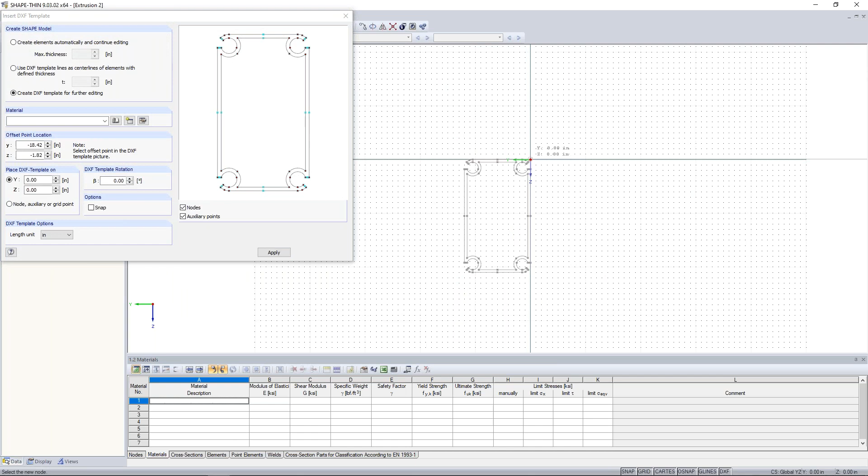So I can click OK through these dialog boxes, and now we'll be presented with our drawing grid where I can simply click within the origin to get a background layer of this cross section. Now, it's not quite as easy as just clicking a button and calculating the cross-section properties.

What we need to do is create these elements that make up this section. The reason we have to do that is because this will allow us to calculate those width to thickness ratios as well, which the program wouldn't be able to automate otherwise. But we have some helpful tips and tricks within this program that will allow us to do so.

Under Edit, we have the ability to set elements with the DXF template, and the first option is to set the center lines. This allows me to click two of these lines, and automatically the program will create the center line between these two DXF background lines. I'm only going to do a quarter of this section because everything is symmetric. Once I get a quarter completed, I can use the mirror tool to create the rest of the cross section. Once we've set these center lines, the next step would be to set the elements, and I do need to define a material here.

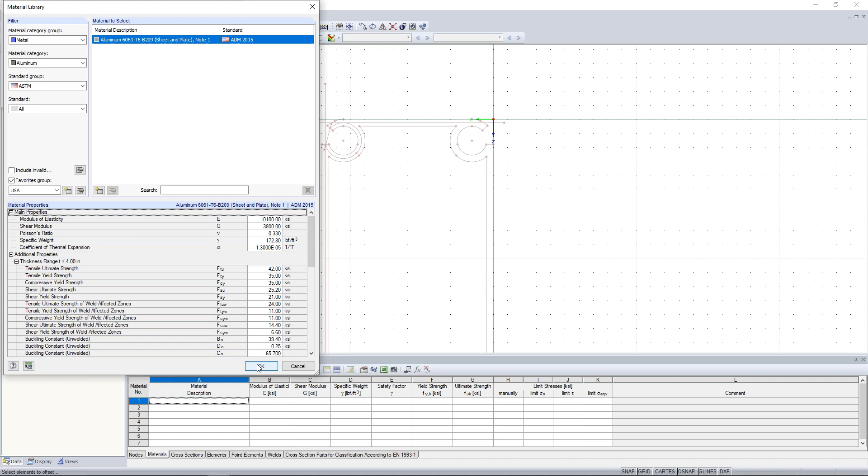The material really doesn't matter within SHAPE-THIN, because we're going to end up redefining it once we get into RFEM. But SHAPE-THIN does require something set here to calculate the cross-section properties. Under the ADM standard, we have all our aluminum materials. I've added aluminum 6061 to my favorites group, which I can quickly select. Again, this is irrelevant since we'll redefine it in RFEM.

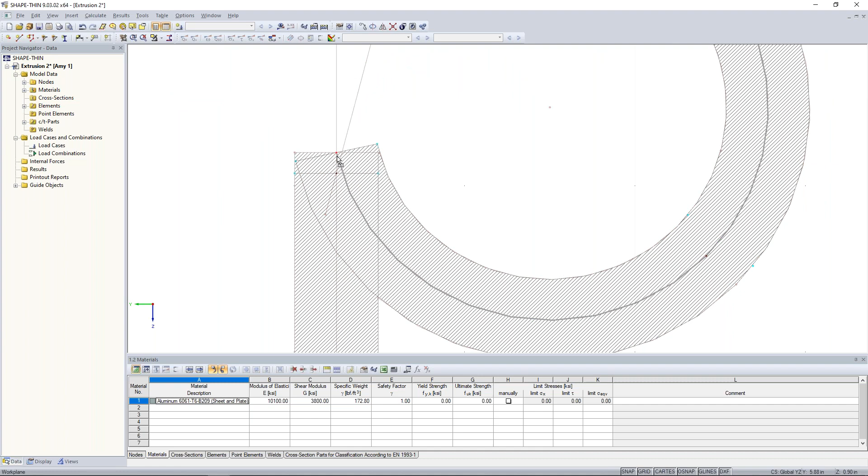I can simply click on these center lines, and you'll notice the elements are automatically set. We need to clean this up slightly by dragging and dropping to the relevant points. Zooming in on both elements on the left, you'll notice this is the width-to-thickness element shown here. The program recognizes what's closed on one side and open on the other, which is important for local buckling considerations within the aluminum design manual.

Now that we have these elements set in the upper left, I'll highlight them and unselect my C-to-T ratio on the left. I'll use my mirror tool, similar to what we'd see in AutoCAD, where we can create a copy and mirror about the Y plane, then graphically choose my mirroring point. I click OK, and now I can see my elements generated at the bottom.

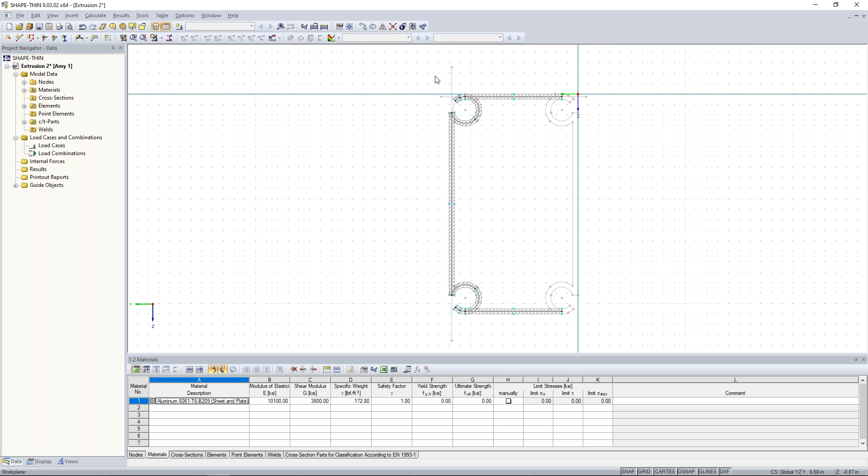Finally, we do the same process on the left-hand side, deselecting these C-to-T ratios, top and bottom. We use our mirror tool, this time mirroring about the Z-axis. We choose our mirroring point somewhere in the center. I click OK, and now our element is complete.

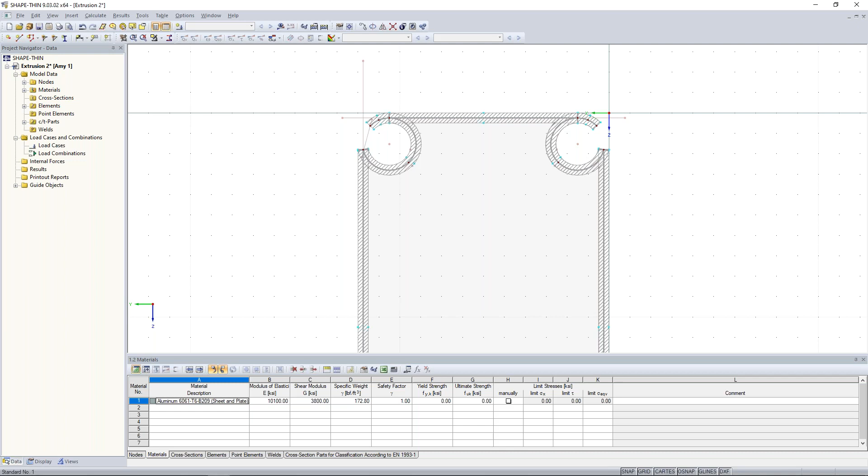Now, one thing we need to do: we can only check local buckling of straight elements. Currently we have C-to-T ratios set for the curved elements as well. If we kept those and went into RFEM, we'd get an error message saying we can't check local buckling of these small curved elements. So I'll delete those altogether on my keyboard, but we still have them for the straight elements. We're finally ready to run our calculation.

All I need to do is click Show Results. The program begins the calculation, and I'm immediately presented with an error telling me that FY for my material is not positive. What does this mean? If we look at the table for this material, you'll notice the yield strength and ultimate strength are set to 0. The reason is that for aluminum we have different strength values depending on whether the member is in tension, compression, or shear.

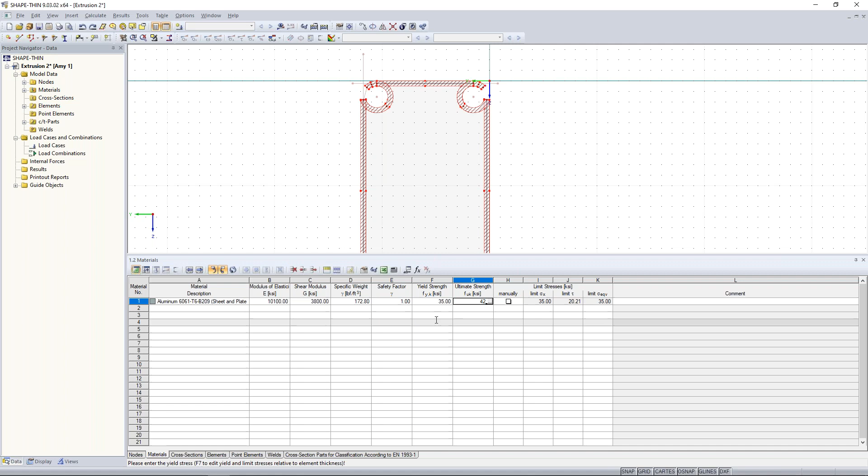So we just need to set some arbitrary value here to calculate these cross-section properties. I can just set 35 and 42 - it really doesn't matter. I try and run this result again. The program gives one more warning message saying the load case was not defined. That's fine, we're not doing a stress analysis within SHAPE-THIN, we're just calculating these cross-section properties.

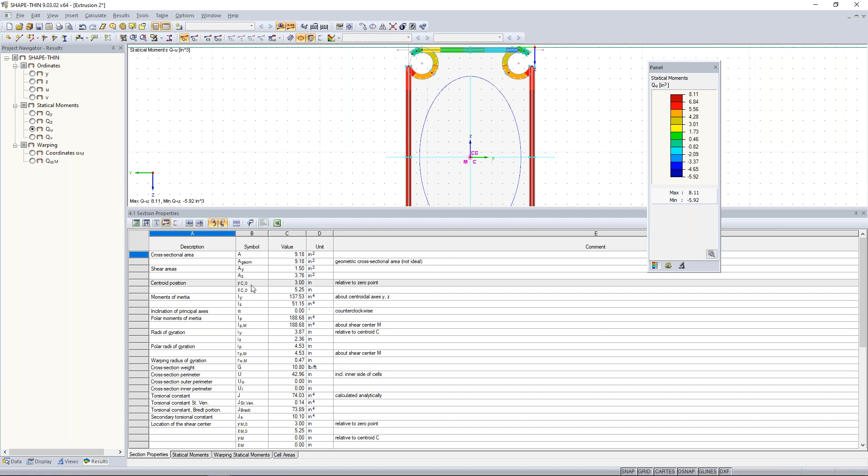Now you can see after the solution is run, in our table here is all of the cross-sectional properties for this custom extruded section, including the area and the moment of inertia. We have the section modulus here, so everything we'll need to integrate into RFEM. It's really important that we save the calculated results - if we don't save, once we bring this into RFEM, the program won't know the cross-sectional values. So be sure to save that, and we are now ready to jump into RFEM.

Here is our main FEA program, and you can see the interface looks pretty similar to what we just saw within SHAPE-THIN, but this is where we'll be able to generate our entire structure. I have my graphical interface, and I'm going to begin by modifying my drawing grid, starting off by drawing a few nodes. I'll go to my toolbar and choose New Node, and I can either select it graphically on my drawing grid, or type in the node coordinates directly.

So we'll start off with 0, 0, 20. I hit Enter on my keyboard, and that first node is generated. The second node will be 0, -10, 17.25.

And finally, my third node is going to be 0, -30, and 0. So I have these three nodes that are generated that will somewhat form the left side of my arc here.

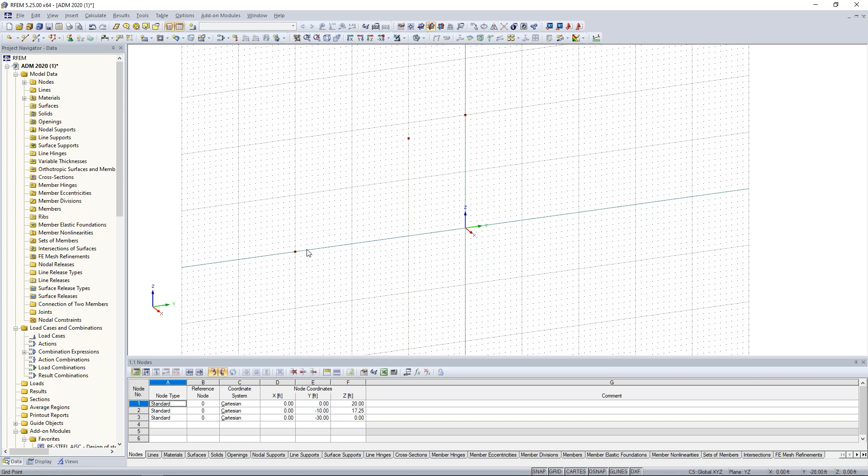I'm going to draw a new line element, and instead of a straight line, we'll choose this option, an arc. I click on my second point, I click on my third point, and then I can either select the radius graphically or type in a radius of 30 feet.

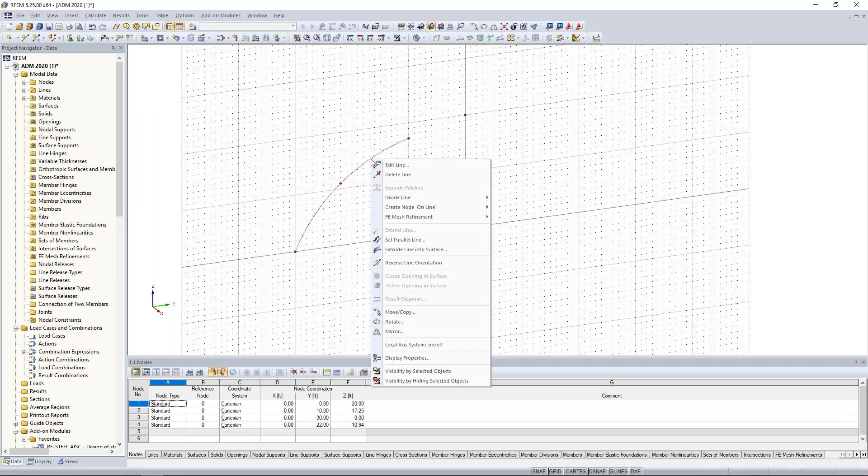I hit enter, and I'm going to take this arc, right click, divide the line by a certain number of nodes, and set this to 3 intermediate nodes. The entire purpose of this is I'm going to take some of these node elements here and completely delete them, so all I'm left with is a series of nodes that will form the left side of what will be my arch frame here.

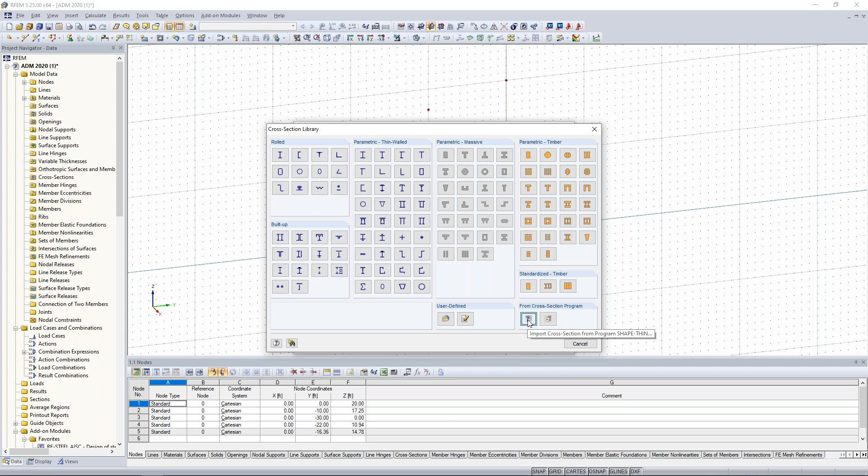So I'm going to draw a new member now, and the new member will have the member type set to beam. I want to generate a new cross section, so I visit my cross section library. Of course, we have all the cross sections from the ADM standard, which we'll get into in a minute, but for this first member, I want to integrate that custom extruded section from ShapeThin, which I can choose with this button in the lower right-hand corner.

Immediately I navigate to where my saved results are, and we see that custom extruded section. Just for reference, if we tried to access one of the other shapes without saving the results, we'd see an error message saying you need to calculate and save the results. But for us, we already did that.

So I click OK. Then we also need to set the material. My material is already set, but if you're creating this section for the first time, you'd likely see a steel or concrete material here.

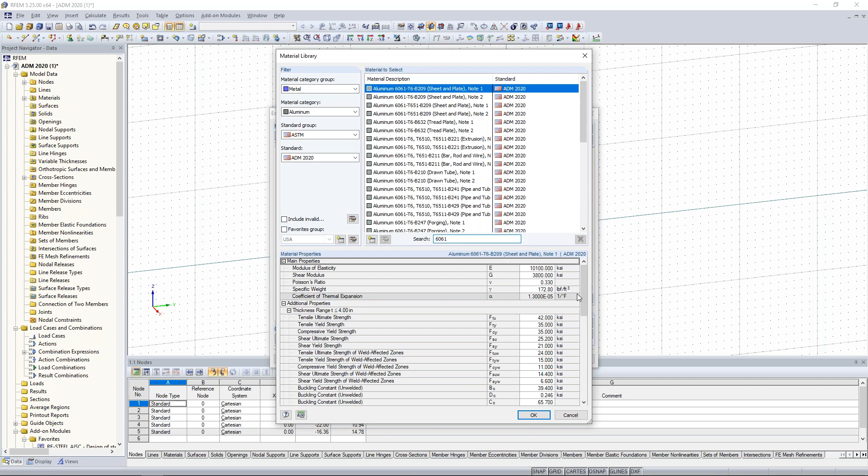So we can always access our material database, and this looks familiar—we've already seen this in ShapeThin, where we can use our filters on the left to navigate to aluminum, to the ASTM, and to the ADM 2020. Again, we have just about every aluminum material you would need here. We can also take advantage of our search functions to select the relevant material, and all the material properties are given to us in this table format.

Once we have the material set, I can click OK through all of these dialog boxes and begin modeling my first series of members. I'm just snapping from one node point to the other here, and we'll finish at the top of the structure.

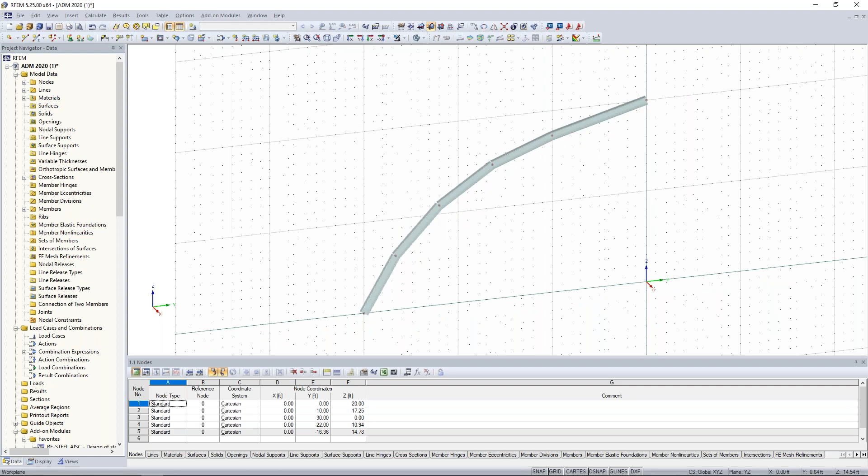Now, notice something also powerful about integrating from ShapeThin is that we actually get the rendered shape here. With some general sections we're just getting some type of blob outline, but we'll actually be able to tell the orientation of that cross section based on the rendered shape.

We'll also notice that these are a series of individual segments, and in reality we'd like to design these as one continuous member. So what we can do is highlight all of them, right-click, and under member we have the ability to create sets of members.

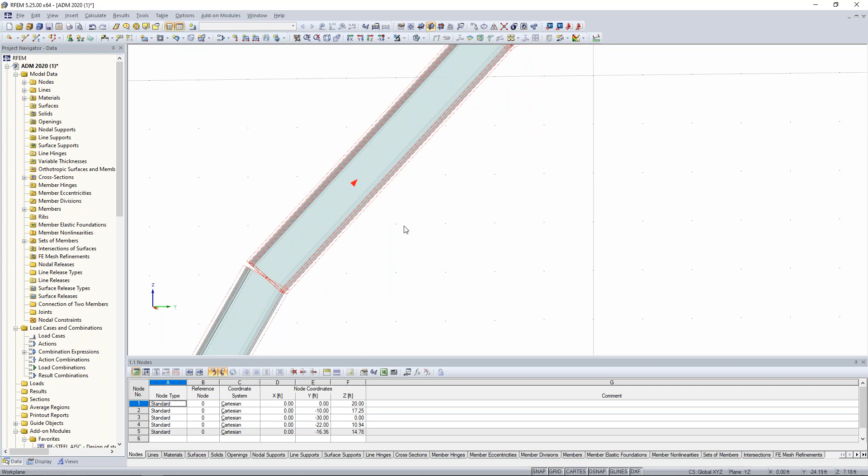This isn't going to modify the analysis—all this will do is group these series together. Once we get in the RF-ALUMINUM ADM module, we can actually design this as one continuous member. So we'll see this set of member symbols; if we zoom in, it's just a faint dotted line kind of grouping these all together. So we have the left side here.

I'm going to highlight all of my elements and utilize my mirror tool. I'll create a copy, mirror about the XZ plane, and mirror about the origin 0, 0, 0. I click OK, and now we have the right side to our arch here.

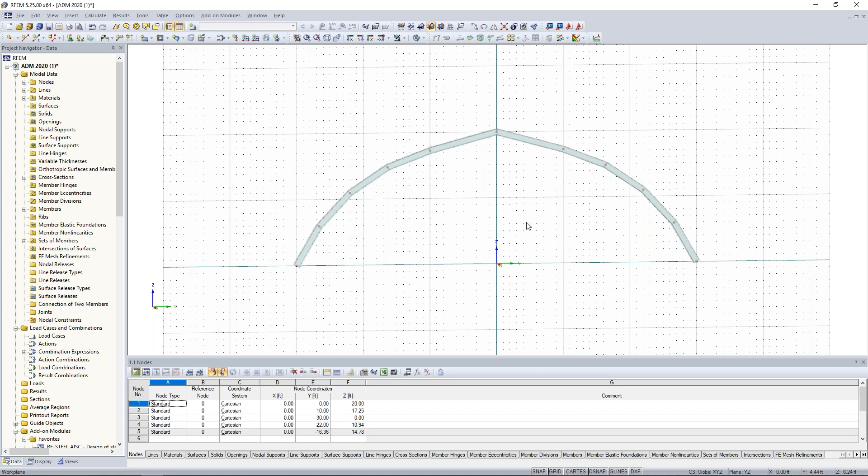Sets of members was also copied, so I don't need to worry about grouping those all together. Okay, so I'm going to take all of these elements with my selection window here, and notice that I'm selecting all of my elements except for my bottom two nodes, and there's a reason for this.

I'm going to go up here to my Move Copy tool, and I'm going to create 4 copies in the global X direction of -16.5 feet. And I'm going to visit this detail settings here—within the detail settings, I have the ability to create copied lines between my copied nodes.

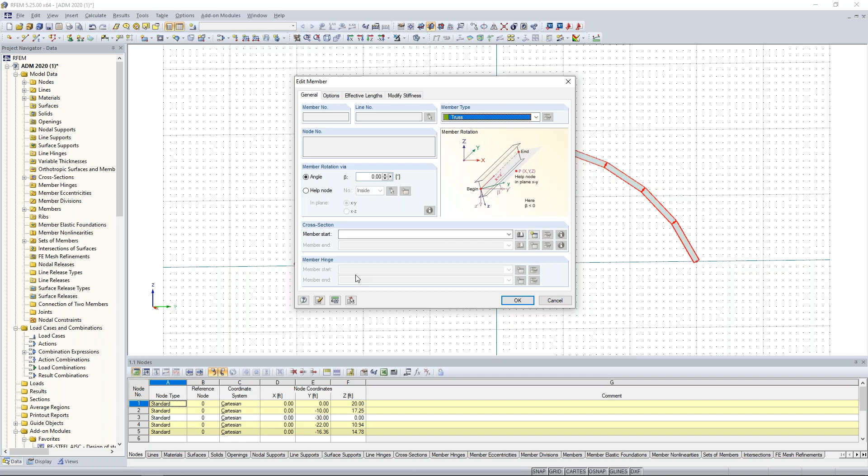And even more so, I can assign a particular cross section to them. So I create a new member, and this dialog box should look familiar. We're going to create now what's called a truss member. So a truss will just internally apply a moment end release to the beam. And you can see under here, under the member hinge options, this is automatically grayed out because the program will apply this by default. And we do need to create a new cross section.

So I go to my cross section library, and this time I'm going to choose a tube section. And within the tube section, you'll notice here that if we use our filter once again to filter to the ADM 2020, we have all of the relevant cross sections to this particular standard. And we scroll down here to choose a 6x6 by 0.375. Now I've already defined that aluminum material for my first beam, so I don't need to define it again. I just simply select it here from my drop-down box and I click OK.

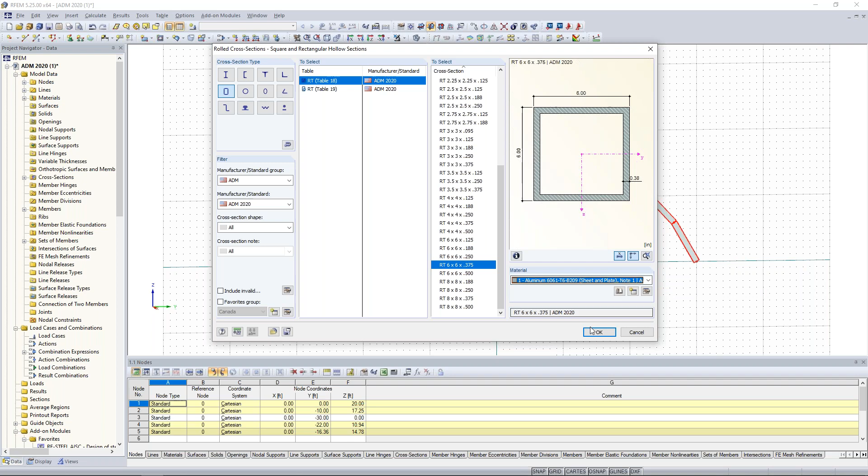So I click OK through all of these dialog boxes, and now we'll notice that the program has generated these truss elements in between my copied nodes. And under the display tab, if we scroll all the way to the bottom, we can view these members by member type, and now we can see which ones are defined as beams and which ones are defined as truss elements.

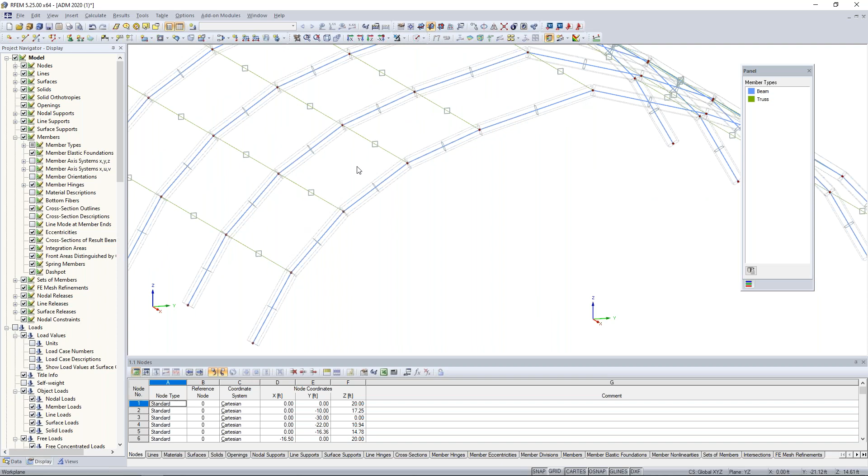Now, something to notice about these tube members spanning in between our main frames here, if I turn this to wireframe view and I scroll up here to my display options and I view the cross-section outline. Well, the tube elements are oriented here according to my global X, Y, and Z axes. They're just kind of facing in the vertical direction here. But in reality, I'd like to see them somewhat angled to kind of follow this arc radius along the main frame here. So how do we adjust each one of these without having to manually do it?

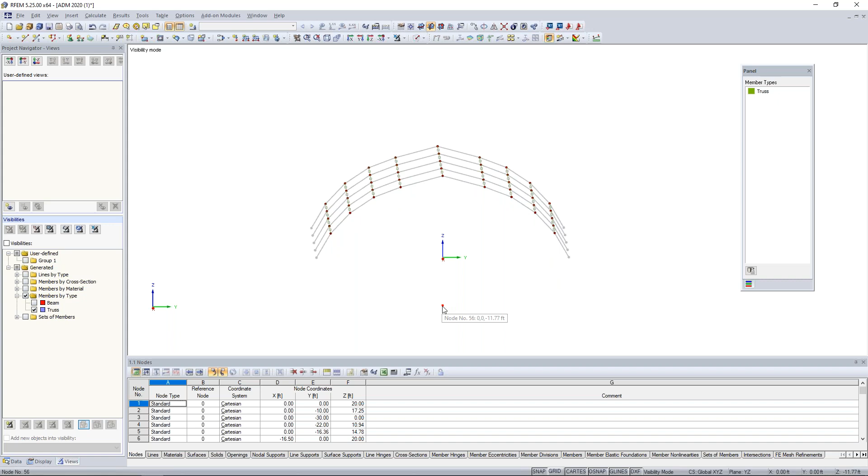Well, under the Views tab, I am going to select the option here to view the members by type, and I'll select all of my truss elements. So now everything else is grayed out within this model. And before I select all of these truss elements, I'm going to create a node. We previously saw how to create a node, so this should be familiar as well. The node coordinates will be 0, 0, negative 11.77, and I click OK. So now you'll notice I have this node right down here, kind of at the center of what would realistically be this circle here. So this defines maybe the radius point, the origin point to the radius here.

I select all of my truss elements, I double click them to edit, and we have the ability here to rotate each one of these elements based on a help node. And I can graphically select this help node, number 56. I click OK, and now when I zoom in, you'll notice that each one of these are angled and they're pointed directly toward that help node at the bottom. So that's just an efficient way in order to manually apply that angle of rotation to all members at once rather than having to individually select them.

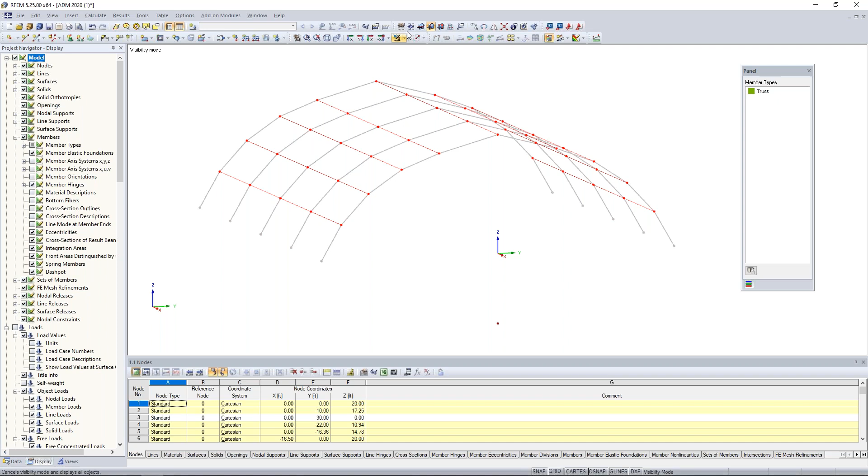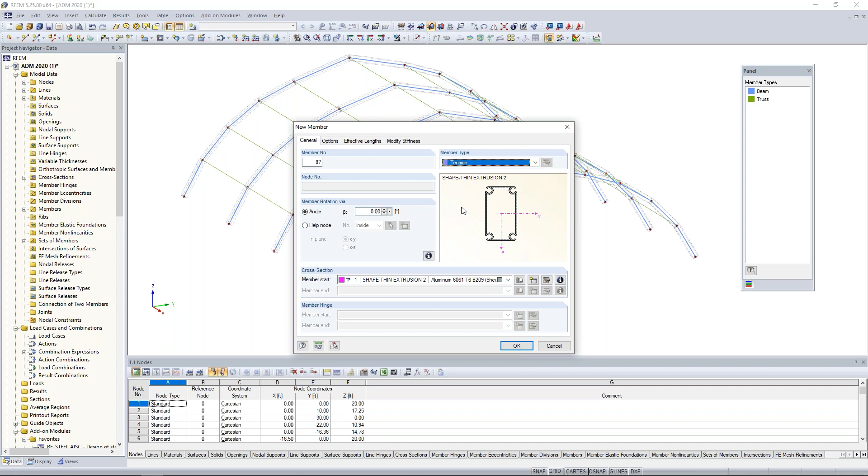Okay, so we will turn off the cross-section outlines. Let's cancel our visibility here. And the next thing to do is to address our lateral bracing. And for this, I am going to draw a new member. The member type here is going to be the type tension only. And tension only is exactly as it sounds. It can only take tension forces. The minute it experiences any compression, it's taken out of the calculation. It can be reactivated though. So if we do see tension again in the next iteration, it will be reactivated.

Member hinges, everything's grayed out here. Again, because that element is only going to take those tension forces, no moment, no shear, no anything else. So we visit our cross-section library, and for this, I'm going to choose my round bar. And we're going to assume this is some type of cable type element with a diameter of 0.5 inches. Now we do need to define a new material. You can see that in my model, I already have it defined, but once again, we visit our material library.

We do have a few manufacturers here if we visit the filters under cable. So perhaps you find your manufacturer here, but most likely you're going to have to create a new material with this button down here to specify the specific material properties for your particular manufacturer that you're using. Now you can see I've generated just a general ASTM cable material for myself for example purposes with the relevant properties.

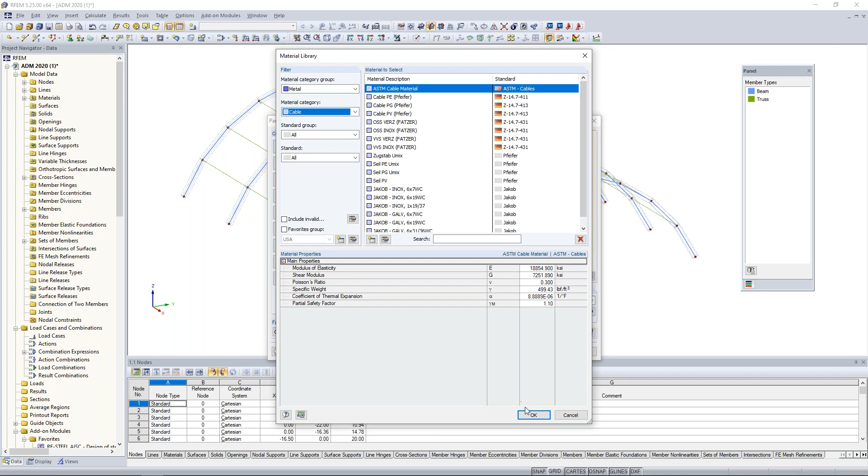I click OK. And then it's really just as easy as snapping to these points from node to node within this first bay to create my lateral bracing. And I'm only going to do the left side here because once again, we have a symmetric section, so we can utilize that mirror tool. So I'll rotate this structure around.

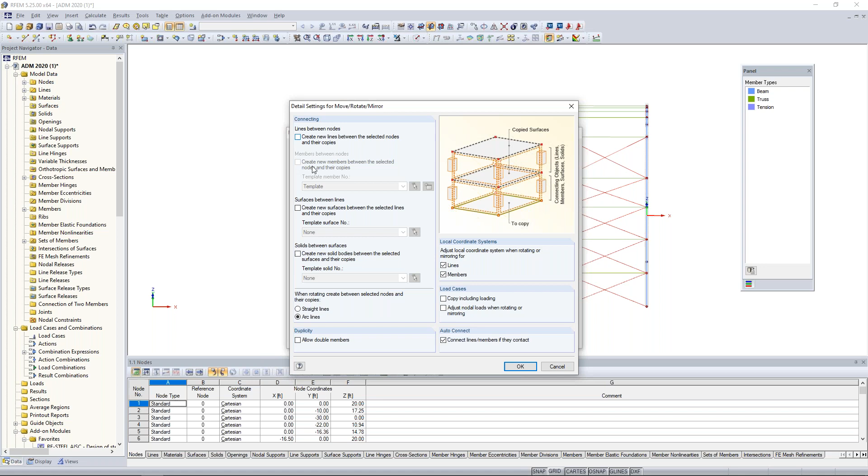I'm holding down my control key to select all of my X braces. We're going to use the mirror tool. We're creating a copy about the XZ plane. We're going to mirror about the origin. The one thing I need to do here is to uncheck the option to create lines between my copied nodes. I click OK, and now we can see the X bracing on the adjacent side.

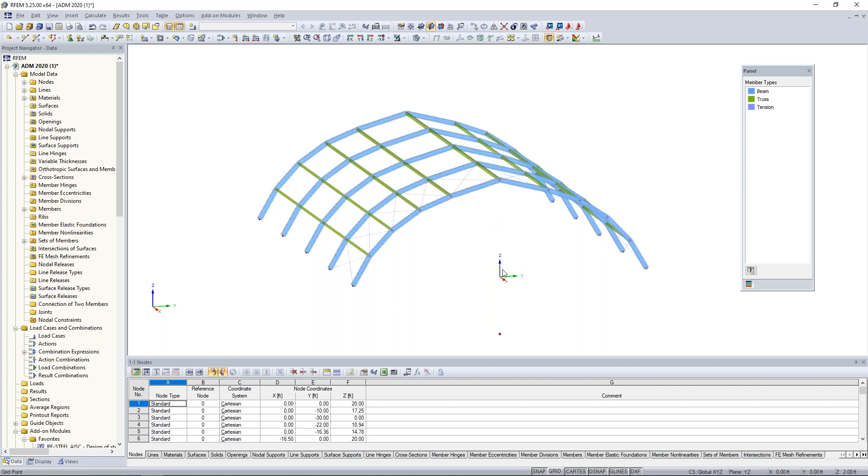All right, so we have all of these elements defined. The final thing to do for our supporting aluminum structure here is to go ahead and draw some columns and beams at the front and rear of the structure for additional support. So I'm going to turn on my grid element and we're going to draw a new member. This time the member type will just be a beam. We are going to select our 6x6 that we've already defined with the relevant material.

I do want to define a member hinge here. So at the member end, I'm going to create a new member hinge definition. Now the program automatically assumes we want to release the moment about the local Y and local Z axes of the member, and this would be the definition of a moment end release. So we can go ahead and click OK, and now we can see that definition defined here. I click OK, and then it's really as easy as snapping from this origin up to my frame. So I'll do that at 3 locations here.

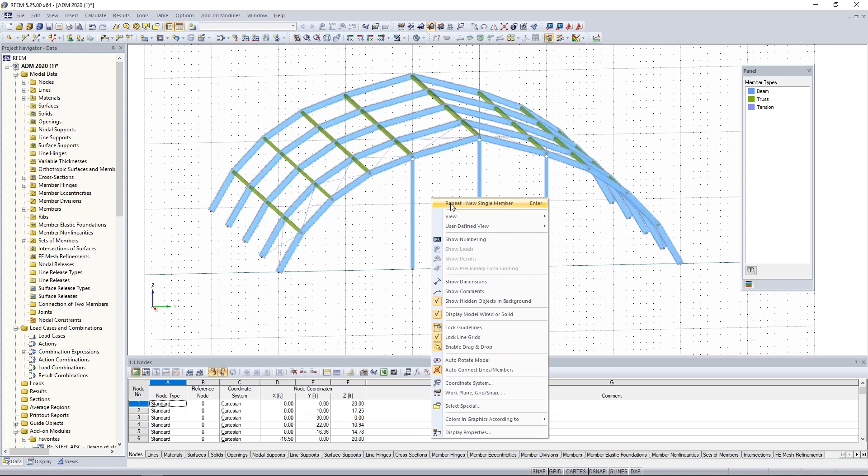I right click a couple times and I'm going to repeat the new single member. Same exact concept for my small little beam elements, but I am going to apply a member moment release here at both the start and the end. I click OK, and then I'm going to snap to the midpoint of the column on my left. The program detects what is the perpendicular point with my snap settings, and now we have a couple beam elements drawn in here.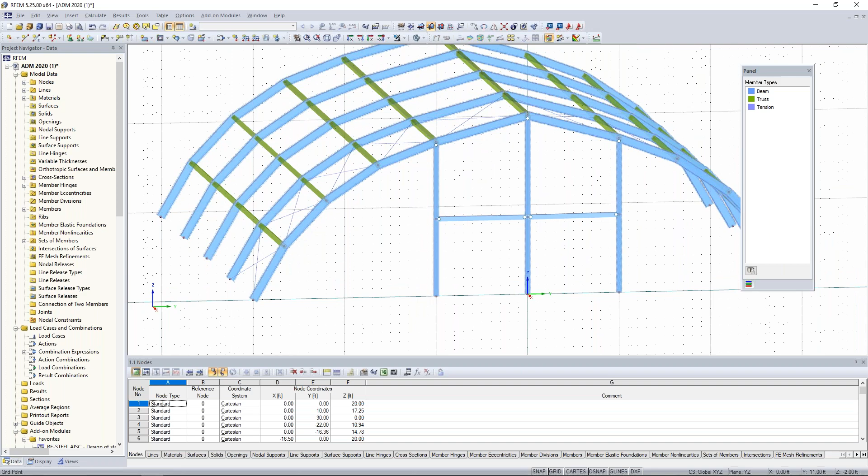Now, similar to my main frame elements that we saw before, I'm going to take each one of these series of members that were broken apart because of the beam. I right click and I'm going to create a set of members here for these 3 elements. I click OK. So now we have sets of members defined for those columns. I take all of these elements, I highlight them, I can hold down my control key, and I can actually just drag and drop to make a copy to the rear side.

So in all reality, our structure is complete for the aluminum modeling. The final thing to do here is to apply a nodal support at each one of these points down at the bottom. So I can draw a new nodal support, and we'll just use the default option here, which is typical pinned application. I click OK, I can rotate my structure around, and this way I can select all nodes at the bottom. And now you can see I have that pin nodal support applied to each one of these members.

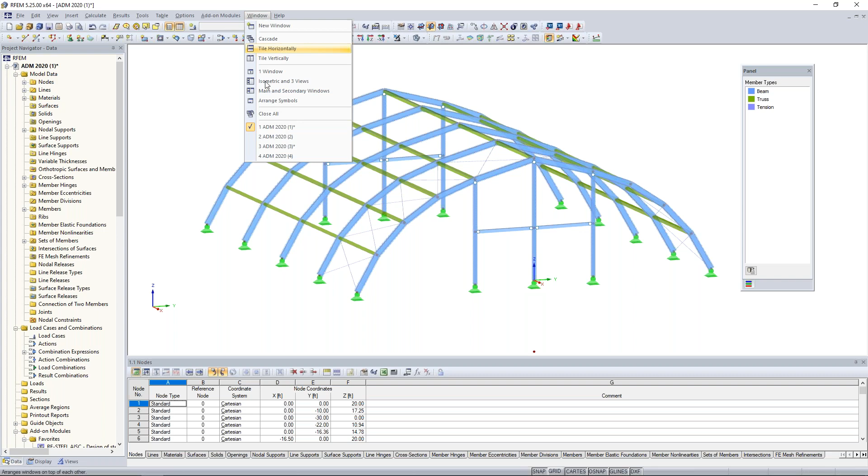So we are going to take the next step and apply the fabric membranes to the rest of the structure utilizing the RF-FORM-FINDING add-on module. Now, because this is an aluminum webinar and I want to focus a little bit more on aluminum, I will jump to an already saved model here where you can see these fabric membranes have already been modeled. So if we're taking a look at one of these, I'll just give a brief explanation here.

If I take a look at the surface, the stiffness is set to membrane orthotropic. And I did define a material here. So if we take a look at the material settings, the material model is set to orthotropic elastic 2D. And if we look at the detail settings here, it's exactly as it sounds. With orthotropic, we have different stiffness properties in both the X and the Y direction. So this might be information that we get directly from the manufacturer for modulus of elasticity, shear modulus, and so on.

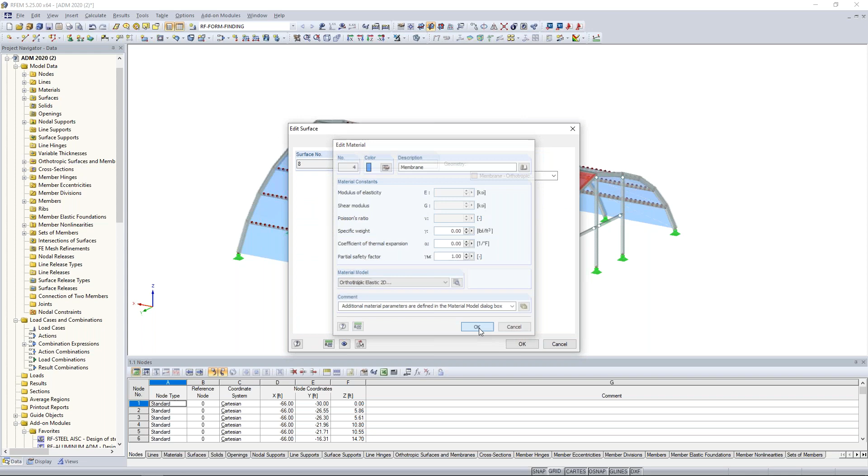So once I've set the material here, we can go into the detail settings of these orthotropic membranes. And under constant thickness, we've set the thickness to 0.03 inches. And we can view the stiffness matrix. Now notice we only have entries for the D66 through D88 for this surface, and that's because it was defined as a membrane and it will only take tension forces, in-plane tension forces. So that's why we have maybe a smaller stiffness matrix than what we'd see with a typical standard surface.

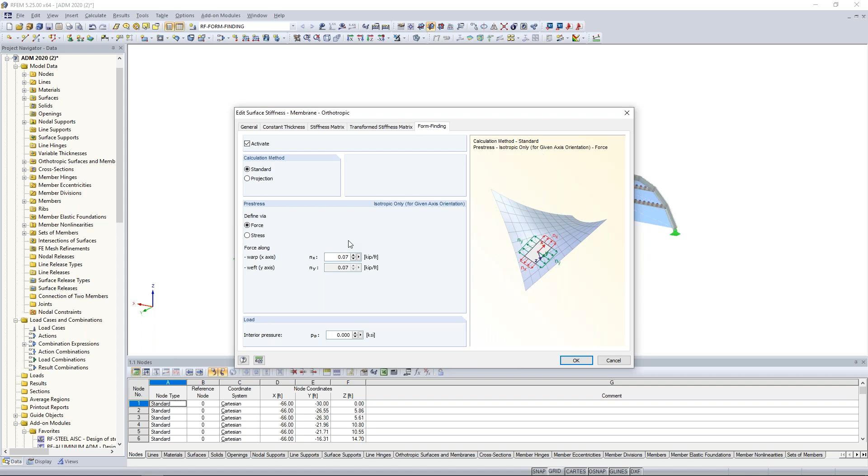Now finally, this last tab is only available when we've activated this RF-FORM-FINDING module. So what this allows us to do is to set a pre-stress force, for example, and I've set this at 0.07 kip per feet in both the X and the Y direction. The program will automatically calculate the relevant form finding shape for me based on these pre-stress forces. So I click OK through all of these dialog boxes. That's just a brief overview.

And I also have cable elements defined at the bottom here. And these cable elements define the boundaries here for my fabric membranes as well. Now the member type is set to cable. So this is a little bit different than our tension only members. And the reason why, if I go into these detail settings, again, utilizing the RF-FORM-FINDING add-on module, I have the ability to set a pre-stress force of 2 kips.

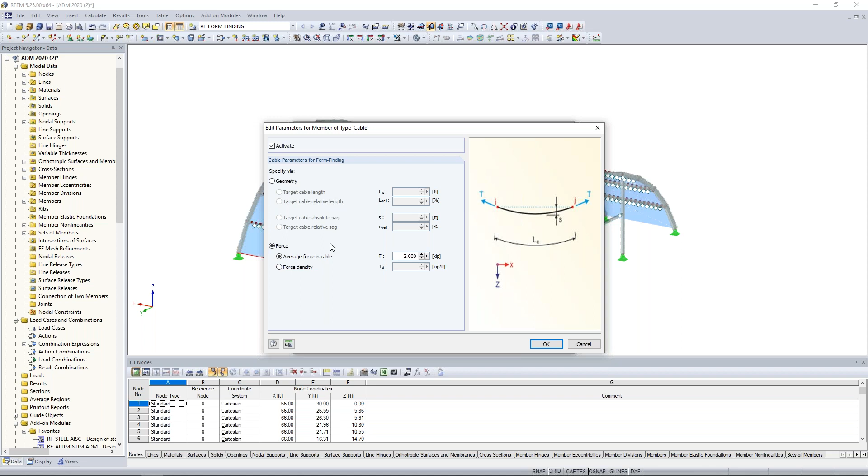And I can model this cable element completely straight. And the program, in particular the form finding module, will find the catenary shape for me based on these preliminary settings. So pretty powerful in the sense that we don't need to determine what the catenary shape is and model this manually. The program will do everything for us.

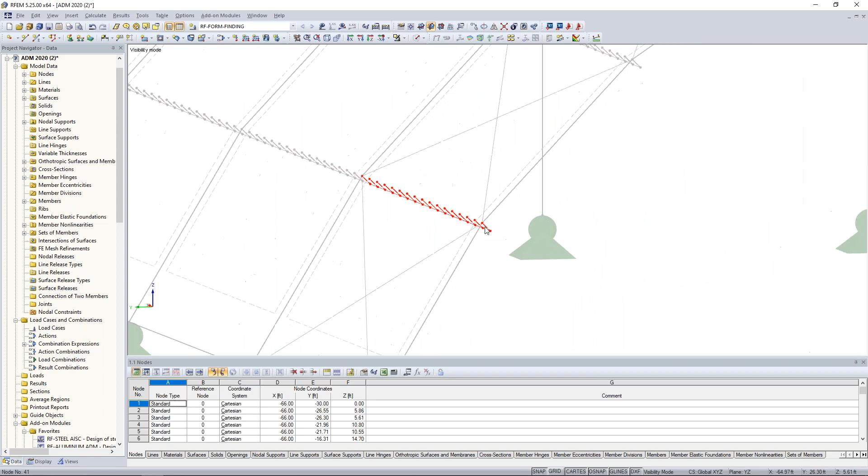The final thing I just want to visit in regards to the form finding, if we turn this into wireframe view, you'll notice that we have quite a few more nodes visually shown to us here, and there is a reason for that. So I'm creating a visibility by the selected objects here. And remember, we created those truss elements. Well, what I've done here is I've actually dropped this truss element about 6 inches or so below my fabric membrane. And then I have these rigid links connecting the truss element back up to the fabric membrane surface. And these are spaced at about every 1 foot, which is the length of my FE mesh.

Now, what's so special about these rigid links, if I double click on them, they have a member hinge set here. If I look at the detail settings, I've actually released the translation at the top of these rigid links to allow the fabric to slide over those tube elements. So I have no restriction. They can just simply slide in those translation directions here.

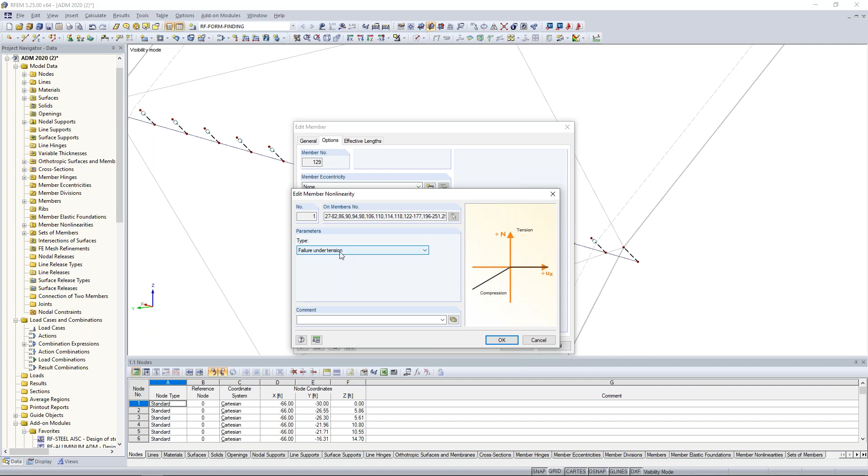What else I've defined for these rigid links is a member nonlinearity, so that this member fails under tension. What this means is when the fabric has uplift, we're not going to see any connection between the truss element or this tube element and the fabric membrane. That bond will essentially be broken. But if we have downward deflection of the membrane, that tube element will catch the fabric. And this will make a little bit more sense as we view the deflected shape under the various applied loads.

So I just wanted to briefly explain what all of these various nodes are shown at these truss elements. So that was just to kind of tie in together the fabric membranes with the tube elements and giving us the ability here to apply these nonlinearities to take into consideration the true behavior.

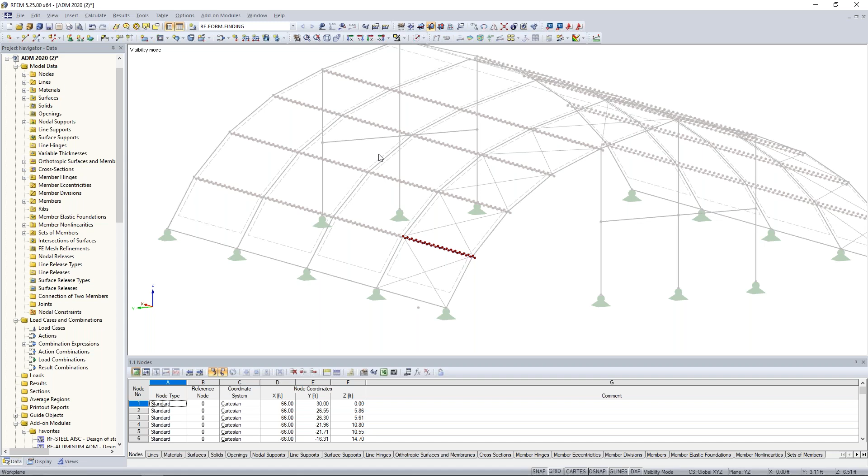Okay, so if we cancel out of this visibility here, what we can do is to begin by running the form finding module. So that's the only so-called load case I have defined here, and that automatically pops up. And again, we are just taking those pre-stress forces from the fabric membrane and the cable elements to determine what the relevant shape is. And we still have this aluminum structure underneath the fabric membrane supporting the rest of those elements. So we can see the progress bar down here on the lower left as well. The program's just running through those iterations to find the relevant shape.

So once we are done running the form finding process, we can see the relevant shape here. So our cables now have some type of catenary shape here. Our fabric membranes look accordingly based on that 0.07 kip per foot pre-stress value.

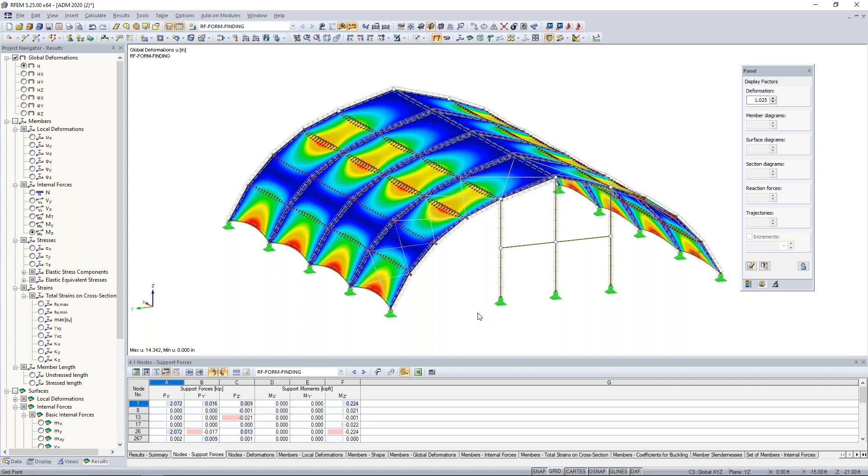So the next thing to do then is to move forward with the rest of our load cases. So I'm going to generate a new load case here. And the first load case will be set to dead load, and I'm going to activate self-weight here. The second load case is going to be a general snow load with the action category set to snow.

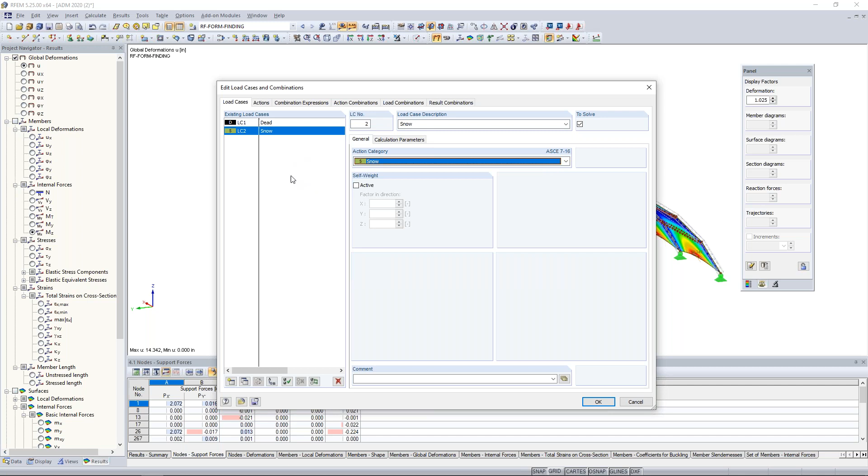Now, I will create a couple wind cases too, but I'm going to utilize RWIND Simulation, which is the standalone program, which will automatically create those load cases for us. So nothing to worry about now. We're just going to focus on these 2 load cases.

So for our dead load case, we select it here within our drop-down box. And let's just say we want to account for maybe some additional dead load along these main frame elements. And we can do so with a new member load.

And I'm going to apply this to the sets of members. And the sets of members just might be a little bit more efficient than manually applying to each individual member segment. We'll apply it in the global Z direction. The magnitude will be negative 0.08 kip per feet.

I click OK, and let's see. I guess I need to set my members first. Let me try that over again. So if we go up here to draw a new member load, there we go. I must have selected the wrong application. We'll choose sets of members in the global Z direction, negative 0.08. So you can either set the members previously if you have them selected graphically, or in this scenario, we will just select them after we've input in the load magnitude.

So as you can see, I can click on my sets of members on the left-hand side. We also could use the mirror tool once again, but it's really just as easy to also click these sets of members on the right-hand side as well. So you'll notice that once we are done applying this member load to those sets of members, everything's shown graphically to us here. So moving on to the snow load.

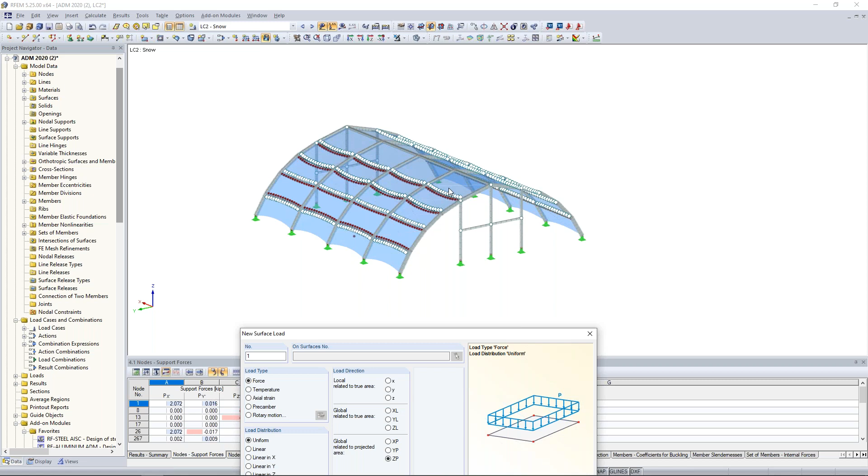So we want to make sure the snow load is available to us within this dropdown, and this will be a surface application. So I choose a new surface load here. And the load direction is going to be in the projected Z direction. So what does projected mean? Well, at these locations where we have a steeper angle, we're obviously not going to see as high of a snow load as we would where our membranes start to flatten out at the top. So the projected load will take that into consideration.

We give it a magnitude here of negative 0.005 kips per square foot, something relatively small, and then we can highlight over all of our surfaces here graphically, and now we can see that projected load applied to the top of our structure. So we're now ready to move on to wind loads.

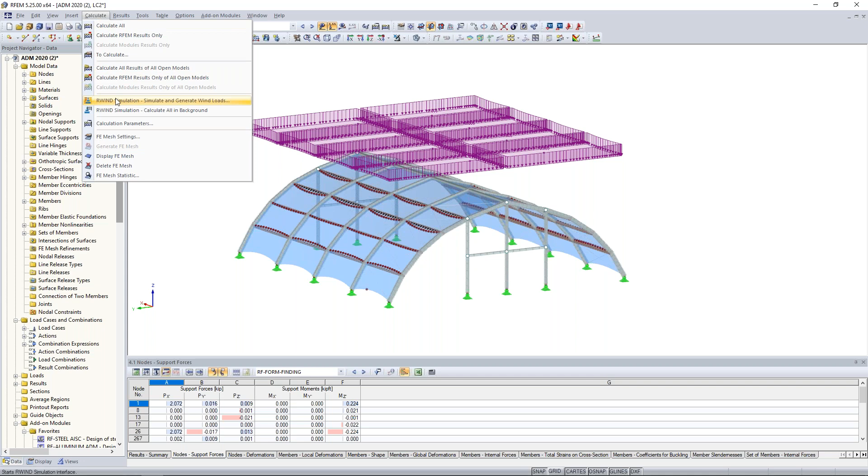And for this, of course, we can manually apply our wind loads, but I want to take advantage of our standalone program, RWIND Simulation. Under Calculate, we can see here RWIND Simulation, and this is just the integration dialog box between the two programs. I'm going to go over this rather quickly for the sake of time, but I have done previous webinars that go much more into detail on RWIND, including all of the details for the input data. I go through the results in much more detail than what we'll have time for today, so certainly refer to our YouTube channel for that.

But just to give you a brief overview, what we can do is to define the wind load directions we're interested in. So for example, we can choose 0 degrees and 90 degrees. And what this means is we'll have a wind load from the X direction as well as the Y direction. And under the wind profile, this just defines the wind speed that will be entering in this numerical wind tunnel for our structure. We do have a few standards integrated within this drop-down box. So you can see here the ASCE 7 is available, the NBC, the Eurocode.

So sticking with the ASCE 7, we would define some information specific to the standard, such as the exposure category. We could leave this as B. Maybe the wind speed is somewhere around 105 miles per hour for the basic wind speed. And then the rest of the factors, we'll just leave as 0. Now you also have the ability to choose a user-defined option here where you can fill out the table of the wind velocity as a function of height.

Under the second tab, these are our two load cases that will be generated. So notice load case 3 and load case 4, which will follow after load case 1 and 2 that I've already defined. Under the settings tab, we have some various default settings for most of this input here that we'll just go with today for example purposes. But the one thing I do want to point out that we've recently added is this option here to keep the RWIND simulation results if the mesh is deleted.

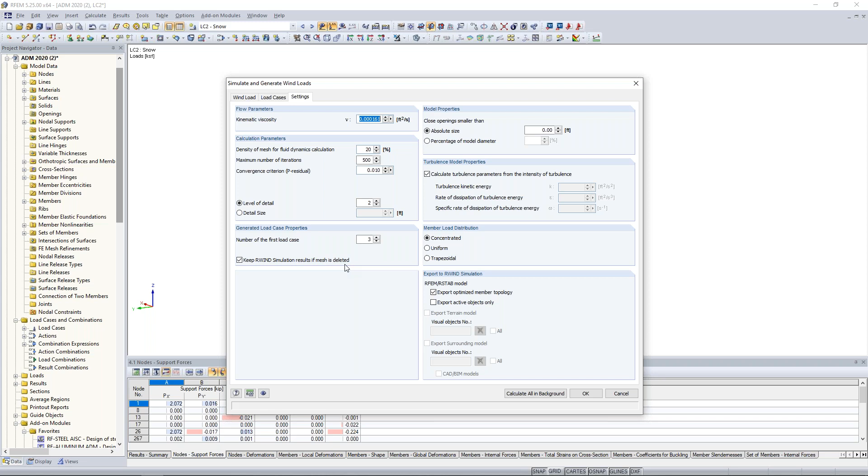So what this means is if you're just making minor changes to your RFEM model, we have the ability now to keep the wind pressures from RWIND Simulation, where previously if we deleted the mesh in RFEM, our RWIND wind loads were also deleted. So this will be definitely a significant time savings if you're just making those minor changes. So back under the load cases, what we have the ability here to do is to calculate all in the background, or we can open up any one of these load cases in particular in RWIND Simulation.

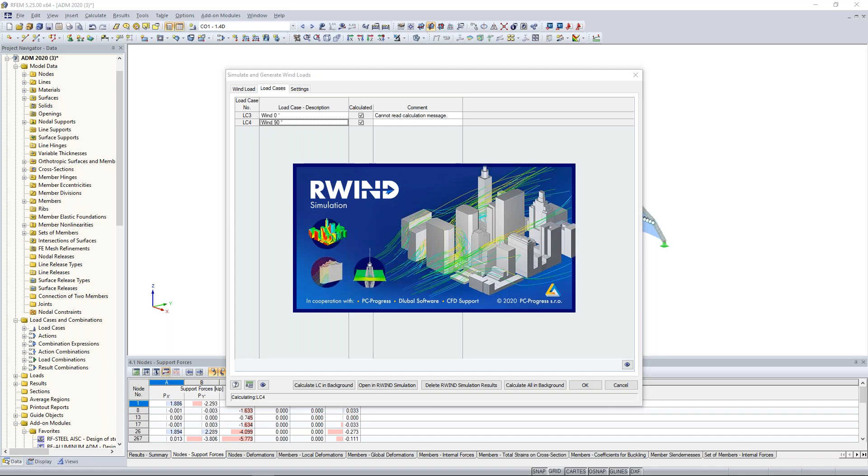So once again, for the sake of time, I have a model here where I have already calculated these wind load cases. So for example, we can take a look at wind 90 degrees and we can open in RWIND Simulation. What this will do is launch the standalone program, and what we'll be presented with initially is the results of our structure, just because I've already run that calculation. But this is what is brought in from RFEM.

Here is my exact structure, including the fabric membranes, all of my lateral bracing, those tube elements, those custom defined sections. Everything is imported into this numerical wind tunnel that we can see here. And the wind flow is going to be from left to right through this tunnel. So once we calculate the results, what we're presented here are the wind pressures on the structure.

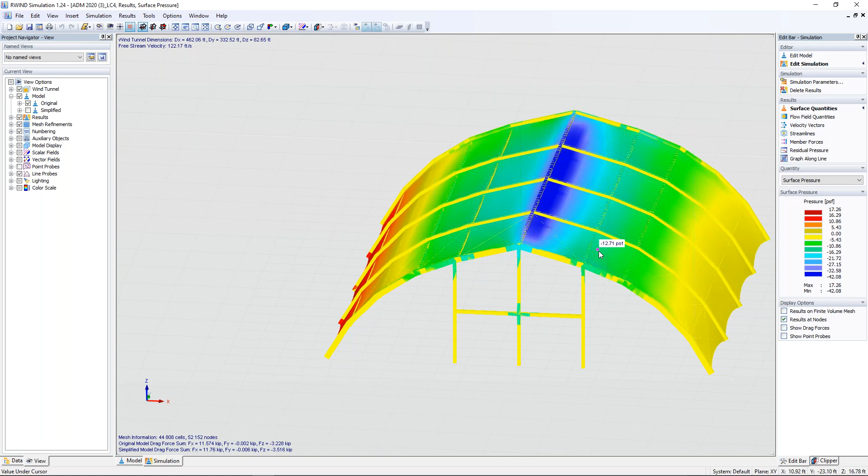So I can actually hover my mouse over the different locations, and as expected, we see the highest wind pressures here where we have the wind entering from left to right. But as we move around the structure, we're going to see decreased pressures, and towards the back, we're going to see, of course, some suction. And we also have different forces on the interior of the structure as well. So both can be accounted for within this wind tunnel. We even have some pressures here on our individual members.

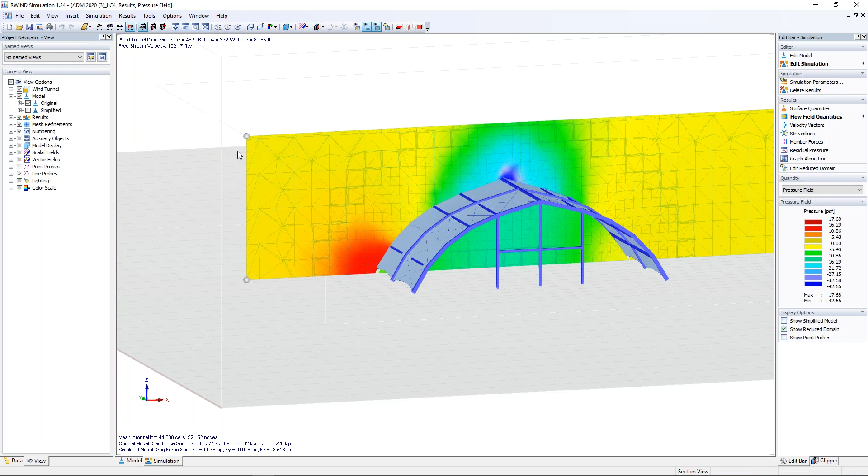Now, a few other ways to view our results: we can view the flow field quantity. So this is just the wind pressure around the structure, and we can grab this graphical view here and kind of slide that back and forth if we're interested not in the structure, but around the structure. Same concept for the velocity vectors here. So this is going to be the wind speed around our structure. We can see the color-coded format here in feet per second of how exactly that wind flow is moving around.

And finally, everyone's favorite, which are the streamlines. Streamlines are just going to show how those particles are moving up and over the structure. We can see we kind of have a swirl effect on the interior of the structure, which is often hard to capture by just general standards. Of course, those standards may give us some minimum design loads, but it might be interesting for us to take these unique structures in here to see the movement of the wind itself.

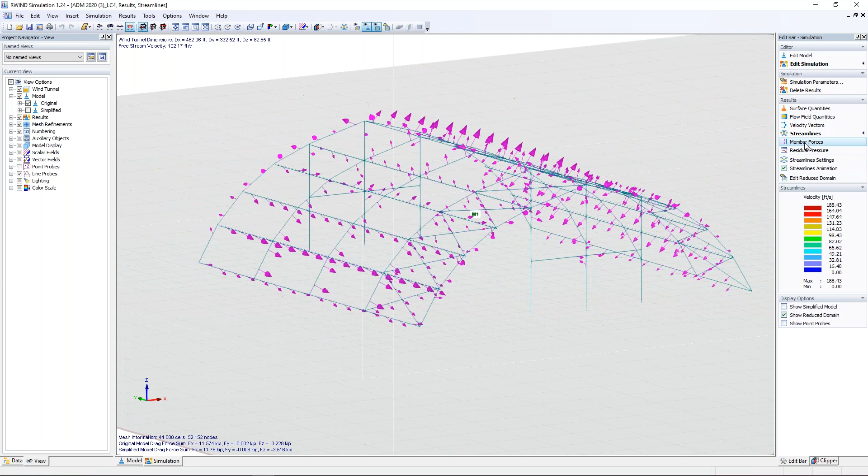So we also can activate the streamlines animation. So we can see the exact movement of these particles up and over the structure and again in the interior. So quite a few different ways to view our results as far as those wind pressures in and around the structure. The member forces are also available to us. This might be interesting because this will allow us to graphically see which members are experiencing the highest forces from this wind load. But ultimately, we're referring back to the pressures here, and these pressures are what is going to be integrated back into RFEM.

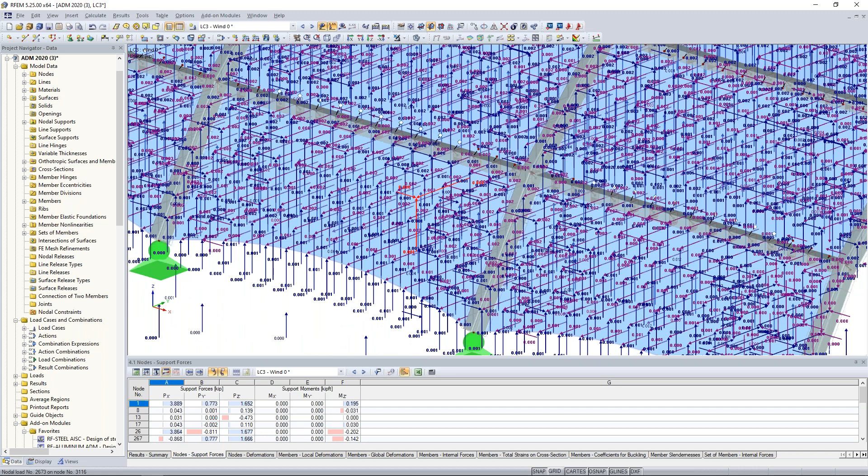So what I can do is exit out of RWIND simulation, and what we'll see are a couple more load cases here. Load case 3, wind 0 degrees, and we actually can turn on the view of these loads. Now this is completely overwhelming, but if we zoom in, what we see happening here is that the program has taken those wind pressures from RWIND simulation and converted them into forces, X, Y, and Z forces, at every single FE mesh point for this structure. So you can imagine how incredibly powerful this is for very unique shaped structures and the ability to calculate these wind loads for really any type.

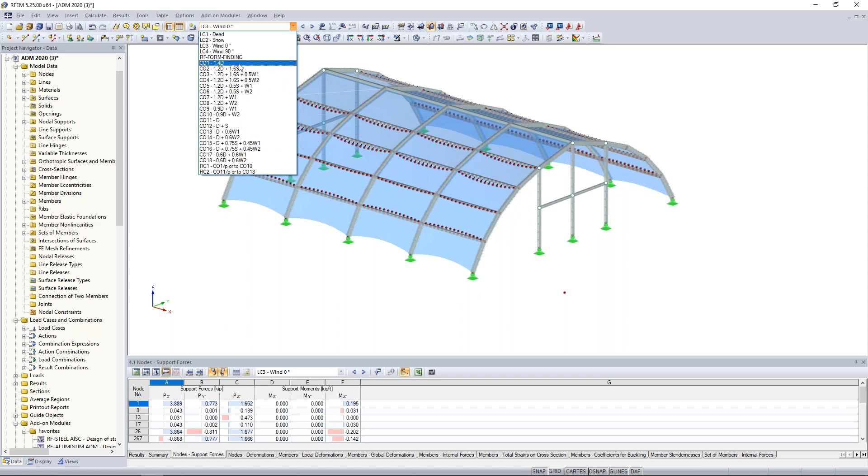So once we have these 4 load cases in general, dead, snow, and wind load defined, you can see the program automatically generated all of my load combinations according to ASCE 7. So we're finally ready to run our analysis on the structure. Well, again, I've taken the liberty here to run the calculation for the sake of time. So once we run this calculation, we are initially presented under our results tab in our project navigator with the deformations. So we can view for each one of these load cases or load combinations the behavior of the structure under the applied load.

So dead load may look as the following, in addition to dead plus snow. You can see in this downward deflection, as I talked about, and we'll see this with the following load cases as well, that when we have pressure here on our fabric membranes, these truss elements on the other side are going to catch it.

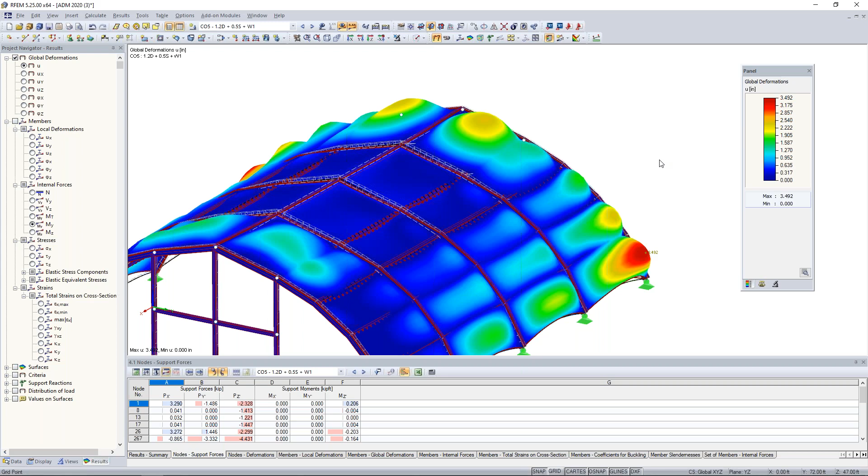In comparison, when we scroll to some of these other load cases where we begin to have uplift, that's where we're going to see the fabric membrane lift away from those truss elements. So the true behavior between those two elements can be considered with those nonlinear rigid links.

So the deflection is important because it gives us an idea if we've modeled everything correctly, and we don't see anything flying off the page. But for aluminum design, we're most likely interested in our member internal forces.

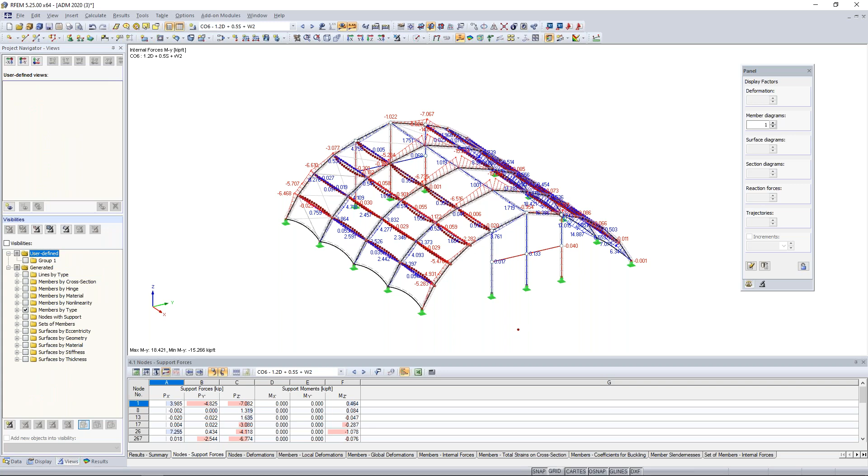So here we can activate the internal forces graphically. Under my Views tab, I'm going to select only my sets of members, so now you can see that everything was grayed out in the background. I just have those sets of members activated.

Back under the results tab, this allows me to view the axial forces or normal forces along these sets of members. For example, we can view shear forces in both the weak and the strong axis direction. We might be interested in our moments, where we can see some positive bending moments on the exterior, and when we look at the top, we have some negative bending moment.

Now, for any one of these members or sets of members, we can always right-click on the element to visit what's called the results diagram. This allows me to view in a bit more detail what's occurring with the internal forces along this full member length.

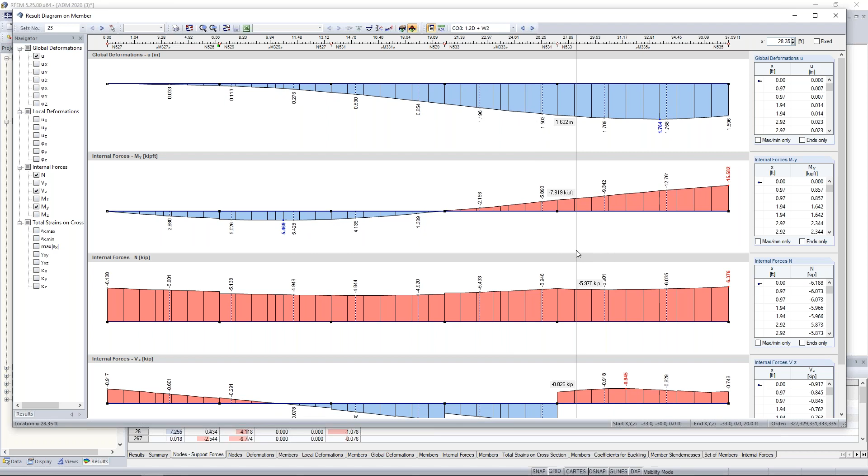We even can change the load combinations up here at the top. We can export this information to Microsoft Excel, or add these graphics to our printout report. So quite a bit of information is available to us, in a bit more detail than what we can see graphically.

Now, of course, we can also view the stresses and strains for our members, and everything is given to us not only in this graphical view within the Project Navigator, but we can take a look at our member internal forces within table format.

What's nice is that as I'm clicking through this table, everything is synced up in the background. I have this big red arrow pointing me exactly to where this controlling internal force is, whether it's the axial force, the shear force, bending moment, and so on. This we can also export to Microsoft Excel.

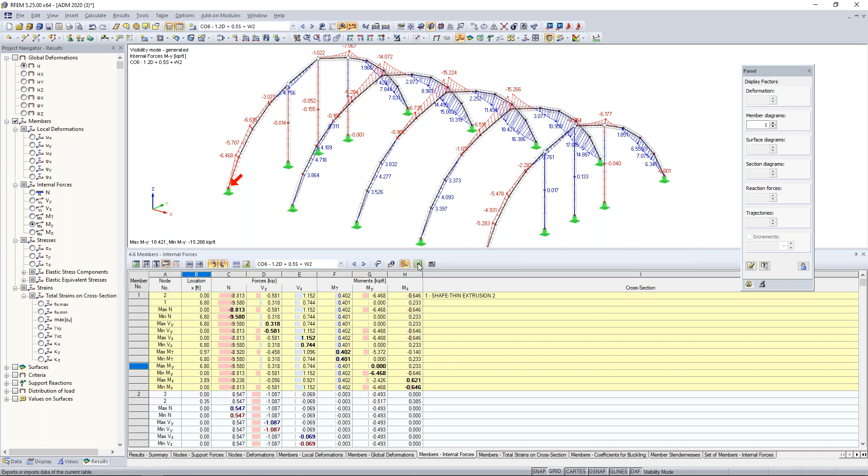This might be important if we're taking it upon ourselves to do the aluminum member design either manually, maybe with Excel spreadsheets, or perhaps we have some in-house tools. So you can utilize RFEM for the analysis portion only. But in just a minute, we're going to be utilizing the ADM module to get more into aluminum design directly within the program.

In addition to our member internal forces, we have some information on our surfaces as well, but I'm not going to explore that in too much detail today with our fabric membranes. Again, previous webinars go much more into detail about fabric membrane design within RFEM utilizing the form finding add-on module.

We can view our support reactions here. We can see all of this shown to us graphically, and of course in table format, we can see the support forces as well with everything synced up here with our red arrow. So that really gives a complete summary of the analysis portion.

And now we want to make the clear distinction that we'd like to jump into the aluminum design module to perform the aluminum design portion of our example today.

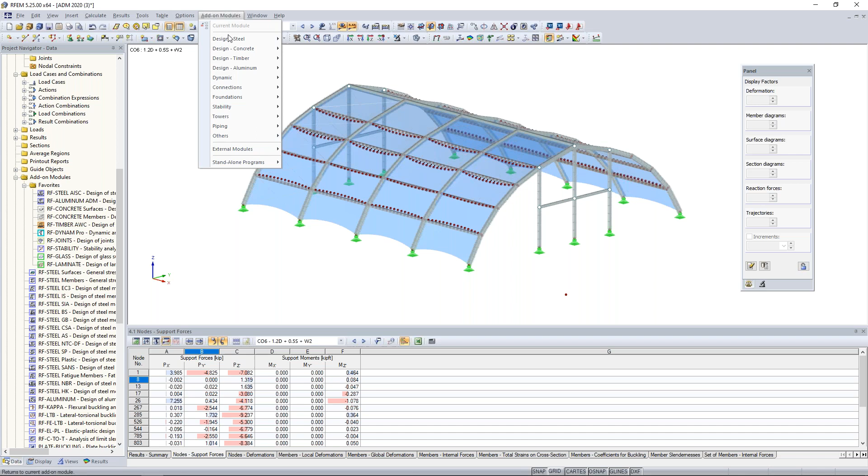So how we can do this is under the Data tab, you can see our long list of add-on modules here, you can see RF-ALUMINUM ADM. I have added this as one of my favorites, so it jumps it up to the top of the list. We also can access our add-on modules here, which are categorized in a little bit more of a format based on the material types, such as Design for Aluminum. We'll see here RF-ALUMINUM ADM.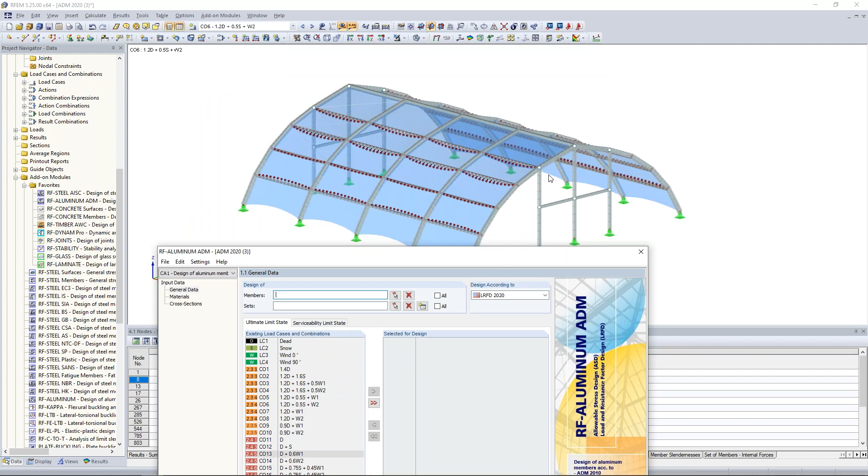Now, this add-on module is just going to be a dialog box that pops up within the main program. So just a simple dialog box here. Now, we don't need to remodel any of this information. A majority of all of our information is going to be brought into this add-on module. The purpose is just to define some information that is more specific for the design process.

So you can see here on the right-hand side, we have our drop-down to select the various standards. We have the 2020, which we recently added, both ASD and LRFD, but we still have access to the 2015 and 2010. For today, we'll be moving forward with the LRFD 2020.

Before I get into more detail with the example, I want to jump back to the PowerPoint to explain some of the updates that have taken place with the 2020 standard. By no means is this a complete list of all the updates within 2020. It's only the relevant changes specific to RFEM and RF-ALUMINUM ADM that I wanted to cover.

So what has been updated within our program? The first relates to Chapter B design requirements. Previously in the ADM 2015 section B22, we had the bridge type structures that were addressed. Well, we'll find within the 2020 that this section was actually removed entirely.

A little bit of history about this: back in 1967 or around this time period, we started seeing aluminum bridges pop up all over the US. Obviously there needed to be some type of design standard that addressed this. So the ADM took it upon themselves to add bridge design into their design standard according to the ASD design method. This did require that bridges and buildings have different safety factors.

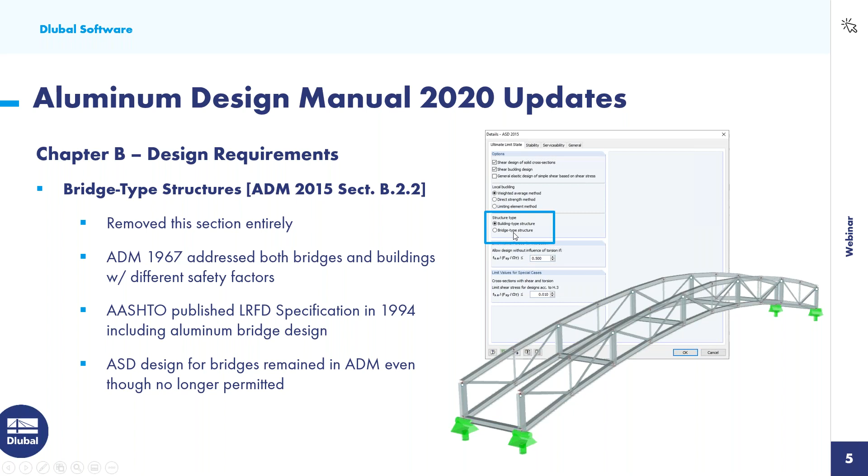So within the detail settings of the RF-ALUMINUM ADM module, if you are running the 2015 or 2010 ASD design, you will still see this option to define whether it's a building type structure or bridge type structure. If you choose the ASD design for 2020, this option is now gone.

Moving on to Chapter F for flexural strength, we have the direct strength method from section F32, and this all relates to local buckling. Previously in the 2015 ADM, this section F32 referred directly back to section B555. You can see on the right-hand side a quick screenshot with that reference made here.

This required all elements within our cross-section to be classified under uniform compression or flexural compression. The reason why is because B555 only addresses elements in flexural compression. So we had to determine which elements fell under which category back in Chapter B.

Well, now with the 2020, you'll notice that all of these equations are listed directly within this section, F32. And although it looks more complicated, this is actually a huge simplification because we no longer have to go through each element and classify it as uniform compression or flexural compression, but rather the nominal flexural strength equations are given directly to us that we can apply to all elements. So simplification is shown here for 2020.

Also in Chapter F for flexural strength, we'll see some differences with the bending coefficient C sub B equation in section F41. Looking at the 2015 equation, we can see this shown on the right-hand side. Now when we compare that to the 2020, right below it, we can see obviously some differences here.

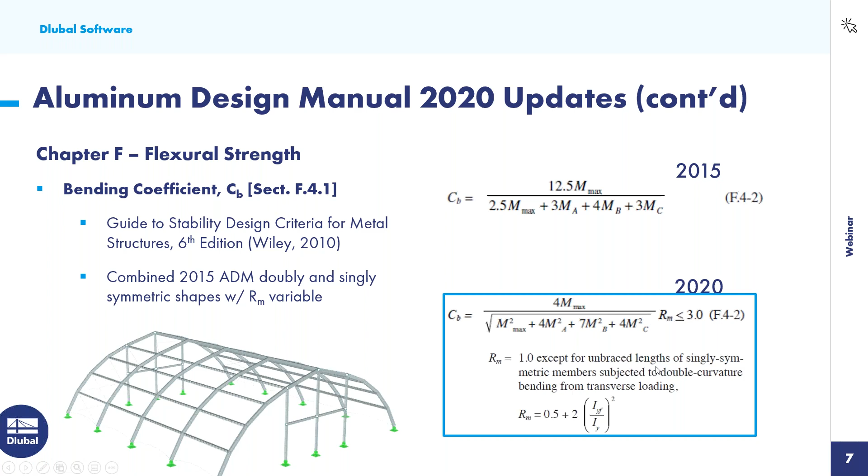And finally, within Chapter F, flexural strength, we have single angles from section F5. All of the updates within the ADM 2020 are consistent with the updates from the AISC 360 2016 manual. I don't have a complete screenshot of the list of all the changes that were made, so you'll definitely want to refer to the code, but just to name a few, we're seeing a lot of changes here with the lateral torsional buckling strength M sub E from both section F5.1 as well as section F5.2.

F5.1 is going to be bending about the geometric axes, and F5.2 is going to be bending about the principal axes. So doing a quick comparison, when we look at equation F5.4 for leg tip in compression, we can see the difference between 2015 and 2020 with these coefficients here, just different values. Same thing for leg tip in tension, equation F5-5, again different values for those coefficients. We'll also see further simplifications in section F5.2.

This is for bending about the principal axes, for major axis bending for equal and unequal leg angles. So refer to that section, and you'll notice the differences between the 2015 and the 2020 versions.

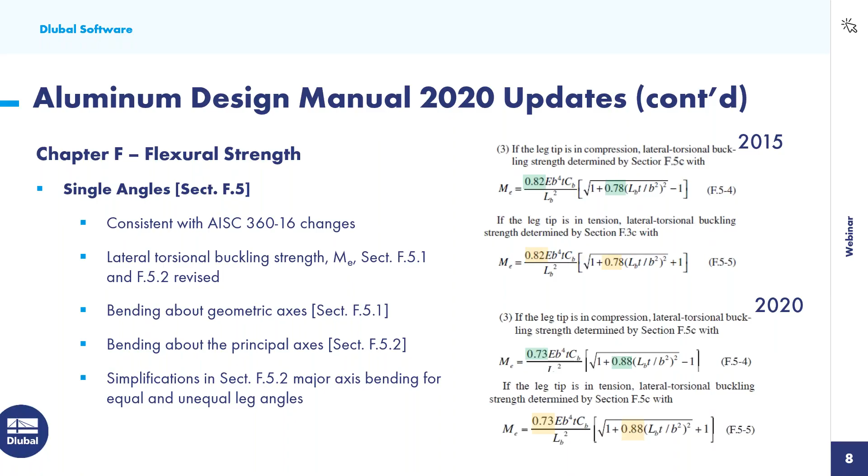Okay, so what we can do now is jump back to the aluminum module and begin the rest of our input for our member design. The first thing I want to do is select the members I'm interested in designing. Under my views tab, let me view here just the members by type.

We're going to select everything except for those rigid elements, and we'll go ahead and hide those. For example purposes, I'm only going to design these 5 members here, just a short list on the right-hand side. Now my sets of members, if you remember way back when, we generated those sets of members because we have the ability to design them in this add-on module as one continuous member.

Once I've defined my members for design, I'm going to choose my LRFD load combinations for consideration of my ultimate limit state design. We also have the ability here to check deflection, so I can choose my ASD load combinations and move those over to the right-hand side. It's really just as easy as moving down this list here.

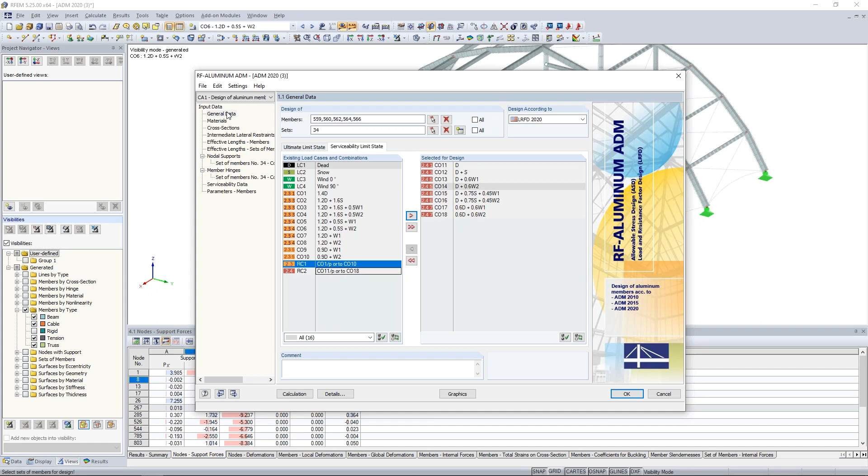Under materials, the aluminum 6061 was brought in from RFEM, no changes there. Our cross section, same concept - we have our custom extruded section and our tube element, again brought in from the main program.

The intermediate lateral restraints - this is not applicable to our box type sections today, but this would be any top or bottom flange bracing in the lateral directions.

Under effective lengths, this is essentially stability design, so only our members are listed here. We have buckling about the strong axis, buckling about the weak axis, and then lateral torsional and flexural torsional buckling. Each one of these has the relevant effective length factor K, as well as the effective length factor times the unbraced length. Everything defaults to the full member length here.

Now for a typical tube type section, we're probably not so interested in lateral torsional buckling - it's not a concern, so we can maybe uncheck all of these options. For example purposes today, I'll continue to show you what this looks like and how our input data will vary. So with lateral torsional buckling for our beam elements,

notice that with the lateral torsional buckling strength M sub E, we have the ability here to design it either according to chapter F or an eigenvalue analysis. An eigenvalue analysis will actually take this member, remove it from the structure, and run a separate eigenvalue analysis to determine the critical buckling moment - a little bit more of a theoretical approach. Realistically, we should get approximately the same values whether we choose to design according to chapter F or the eigenvalue method.

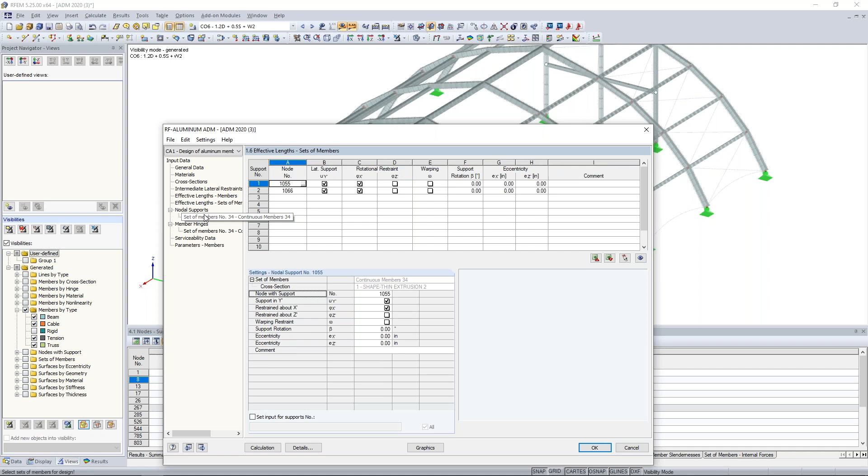Now I'm going to jump down to this next table because this does affect the current table we're looking at - this is called nodal supports. So what we're going to do with this set of members here is extract it from the rest of the model to run a separate analysis underneath the hood for only this set of members. If I create an isolated view here, what this table has me do is input the individual supports for this eigenvalue analysis.

So up at the top, we have a support where we've restrained it in the lateral direction. We've also restrained the rotation about the x prime axis, which the axes are shown up here at the top. Down at the bottom, we have an additional support, and for this, I'm going to restrain it in the lateral direction, but also rotation about the Z prime axis - so rotation about its own axes here - and I'll uncheck rotation about the X prime.

But remember, we also have these truss elements framing into each one of these nodes. So what we want to do here is to select each one of these graphically, and I can select them here back in the main program RFEM. And finally, our last node here. And for these, all I'm going to select here is a lateral restraint. So now we can see each one of those individual nodes set here for that set of members.

If we jump back to the effective lengths, notice a lot of this information is now grayed out because the program's going to refer back to the nodal support table here in order to calculate the lateral torsional, flexural torsional, weak axis, unbraced lengths, effective length factors, and everything related to that with that eigenvalue analysis. Now, strong axis buckling is not addressed by this.

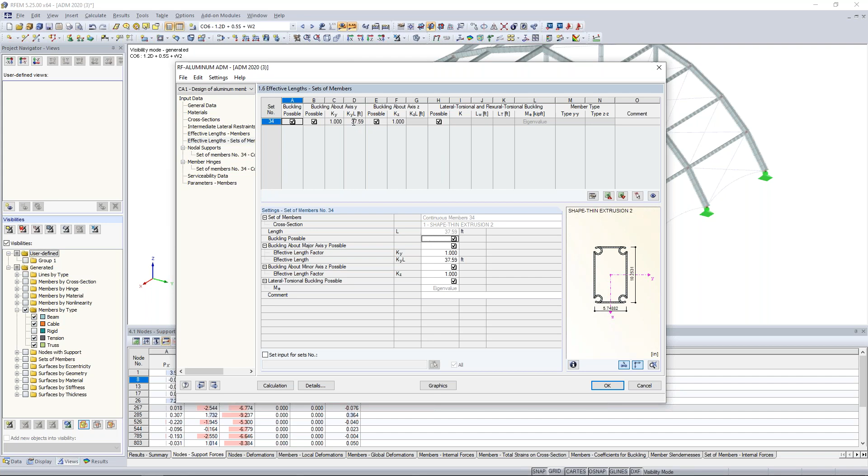Moving on to member hinges, if we had any member hinges along this set of members, we could define that here. Serviceability data will allow me to check my deflections. So what I can do here is to choose my member, and I will select my members graphically. So we can design the same members or even different members for serviceability within the same case. And we also can check our sets of members if we're interested in checking deflection for the sets of members.

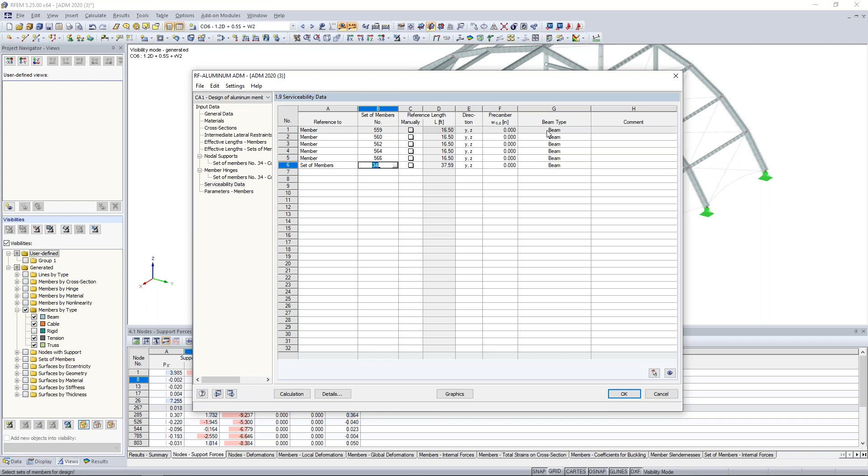I click OK. Notice everything defaults to the full member length, which will be related to the limiting deflection ratio. We can set a pre-camber. We also set if it's a beam or cantilever. I'll show you in just a minute where we can set that limiting deflection ratio for those serviceability checks. Before we do, I just want to visit this last table here, which is parameters for members.

For this, this will refer to the tensile strength according to chapter D for our members. And in particular, section D.3.2b states that if tension is transmitted by fasteners or welds through some but not all of the cross-sectional elements of the member, then we should use the effective net area. And the effective net area equation is actually given in this section in this standard, and it depends on A sub n, which is the net area of the member shown here, as well as the eccentricities of the connection.

And ultimately, we use these variables to calculate the effective net cross-sectional area, which is used for the tensile rupture according to section D.2b. So we don't have that scenario here, but I just wanted to quickly explain what that was all about. Finally, before we run our calculation, just to visit the detail settings here. So remember I said that this is where you would find that bridge versus building structure if you were designing according to ADM 2015 or 2010.

You do have the ability to change the local buckling method here according to chapter F. By default, this is set to the weighted average method, but we have the direct strength method and limiting element method also available to us. Under the serviceability tab, this is where we can set our limiting deflection ratio. And currently this is set at L/360, but for this tent structure, we're not entirely concerned about larger deflections, we don't have any finishes, this isn't really a building susceptible to human perception of large deflections either, so we can decrease this to maybe L/180.

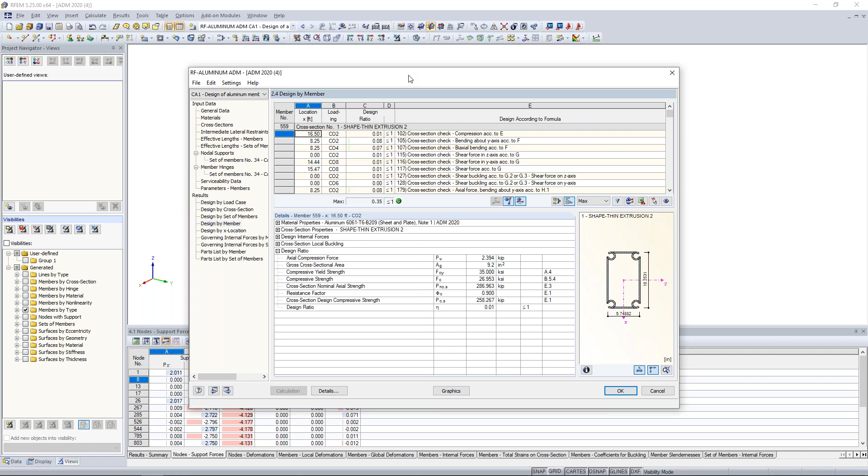So now that I have all of my input data, we're finally ready to run our calculation. And once again, for the sake of time, as we near the end of the webinar, I have already saved these results within the Aluminum ADM module. So I'm going to pull up the module, and what we see after we run the calculation is our table results here, where we can view the design by member. And you'll notice as I scroll down through this member, again, everything is synced up.

What else is powerful is showing this red arrow here for the relevant check. And each one of these members is going to have all checks from the standard shown to us. So for example, if we're looking at member number 559, we have the cross-section checks for compression according to chapter E, bending about the y-axis, biaxial bending, and so on. All of the relevant variables are shown to us here, as well as the references. Now, if you remember way back when, we have this custom extruded section, and I was talking about the local buckling abilities.

Well, if we expand this tree here, sure enough, here are all of our elements that are classified for local buckling according to chapter B. So again, incredibly powerful here in order to check the local buckling of these custom sections. We also can view the design by sets of members. So same concept here. We're viewing just all the information.

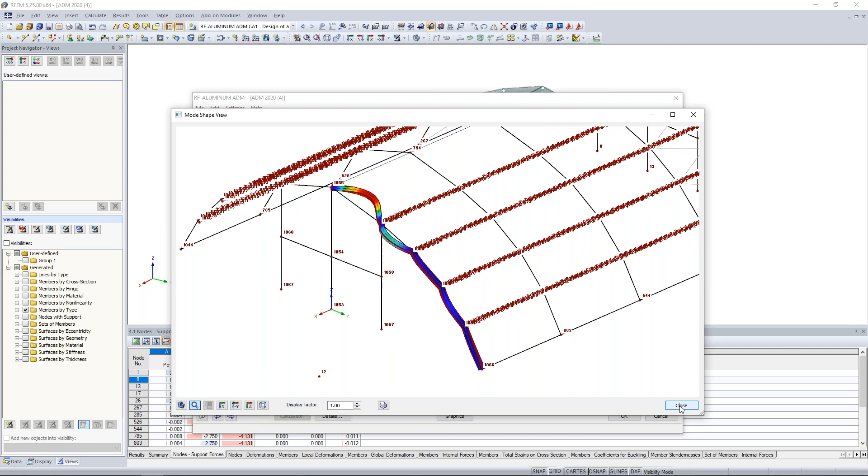Remember, for each one of these members and sets of members, we also did that eigenvalue analysis. So we have the ability here to view the mode shape. So if we scroll around to view the mode shape of this particular set of members, this would be related to the lateral torsional buckling analysis. The program pulls out that member from the rest of the structure. So pretty powerful in what we can do there as well.

Now, we can also take all of these members. I know it's a little bit overwhelming, so if we're just really interested in the max design ratio for each member, we can use our filter options here. And we'll see that serviceability is controlling for many of these, while stability analysis is controlling for several others. And ultimately, we're getting our max design ratio here of 0.35, which we have our green smiley face because we are well below 1.0 here.

Remember, all this information you can export to Microsoft Excel just at the click of a button for further sorting. That includes here a material takeoff list if we wanted to export that to Microsoft Excel as well. Now, all of this information is shown graphically here. So just to lastly touch on this, we're within the RF-ALUMINUM ADM module. We're just viewing our results graphically here back in RFEM.

So you'll notice that we can turn on our ultimate limit state here just to view for each one of these members what that design ratio is. Perhaps we want to turn on the serviceability. We can see serviceability is fairly low until we get to this member down here at the bottom. So again, if we're just interested in viewing this information graphically rather than that table format, it might be interesting for us to view it here back in RFEM.

So hopefully that was a quick overview of aluminum member design. This model will be available on our website where you registered for this GoToWebinar, so you can download it and kind of just see all of the different settings that I have set.